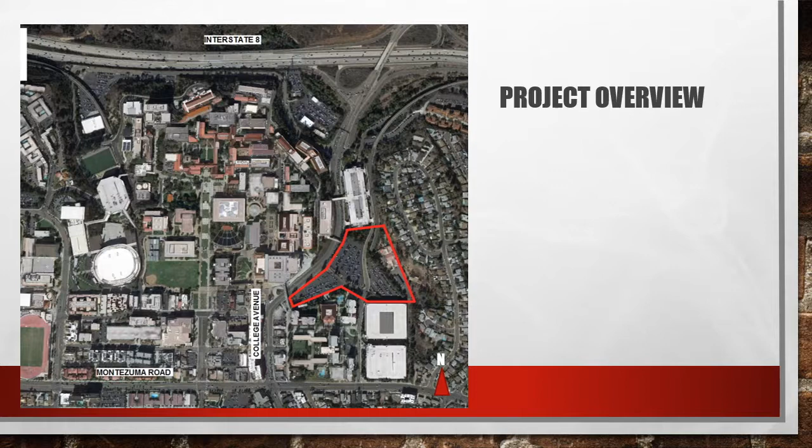The project consists of a study to evaluate the option of building a new football stadium with a seat capacity of 35,000 on the east side of the San Diego State University, SDSU, campus between parking structure 1 and 3.

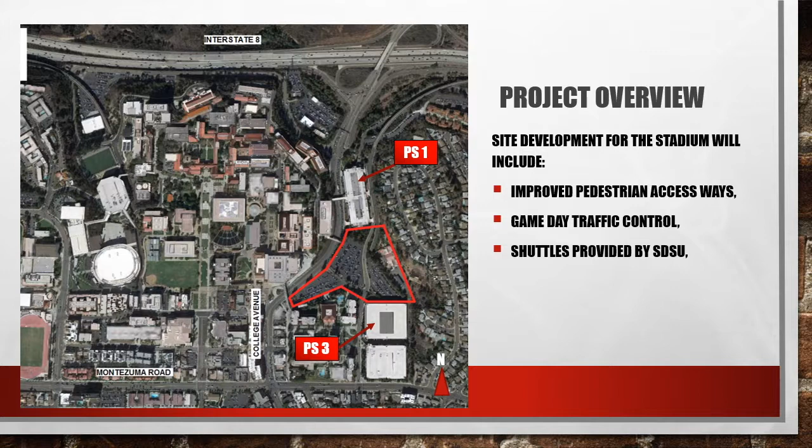Site development for the stadium will include improved pedestrian access ways, game day traffic control, shuttles provided by SDSU, loading zone for attendees, on-site wastewater treatment, and rainwater harvesting under the stadium.

Our project manager and transportation engineer, Miranda McNeely, was responsible for leading the team to success, as well as conducting traffic analysis and improvement recommendations. Our construction engineer, Christian Penlilio, was responsible for construction planning, scheduling, and the construction cost estimation.

Our structural engineer, Juan Ortega Ayan, was responsible for design of the stadium foundation on top of the trolley tunnel, as well as the design for the many site retaining walls. Our site civil engineer and drafter, Gabriel Reyes, was responsible for the drafting of design plans, site grading, and utilities.

Our geotechnical engineer, Fahmi Attar, was responsible for the investigation of site soil type and strength. Our hydrology and drainage specialist, Satara Nuri, was responsible for the evaluation of site drainage before and after construction.

Our municipal solid waste, water, and sewer system specialist, Kevin Clack, was responsible for potable and fire flow water systems, sewer systems, municipal solid waste management, and stormwater quality management and conveyance.

College community outreach to bolster support and enthusiasm for the on-campus stadium would significantly help to lessen the impact of the construction traffic delays on the community. Unfortunately, these worsening traffic conditions are unavoidable as the stadium is to be constructed along a major commuter road, College Avenue.

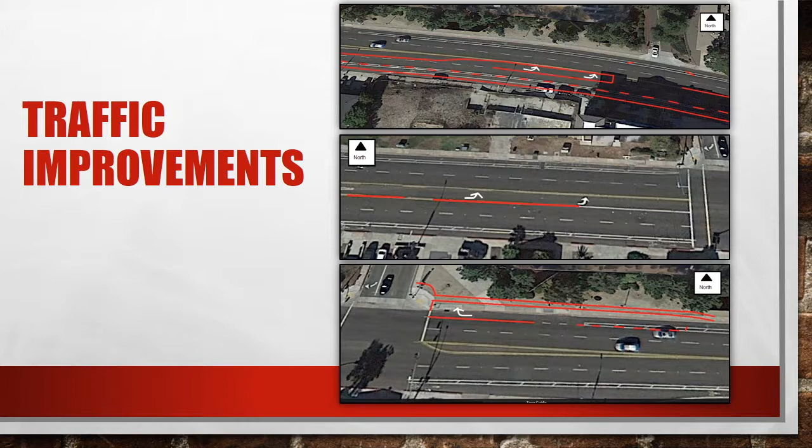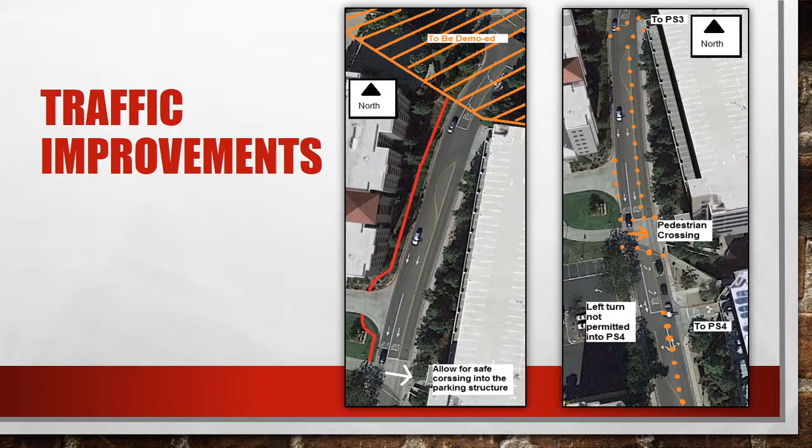Recommended site developments to improve traffic conditions are a complete signal redesign of the College Alvarado, College Montezuma, and Montezuma East Campus Drive intersections, as well as new striping to expand various turn pockets along Montezuma Road, and an additional sidewalk near the stadium. Game day traffic control will also help safely guide pedestrians and vehicles to the parking structures.

3 areas of our site required grading. The first area was graded to an elevation of 426 and serves as the platform for our stadium and a 12 feet wide sidewalk. Due to right-of-way and property line constraints, grading had to be the maximum allowable, which is 2 to 1. This made it necessary to have retaining walls in certain areas of our site.

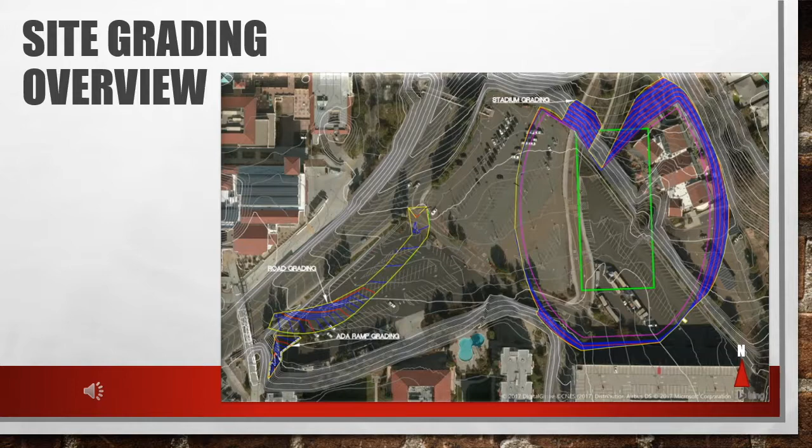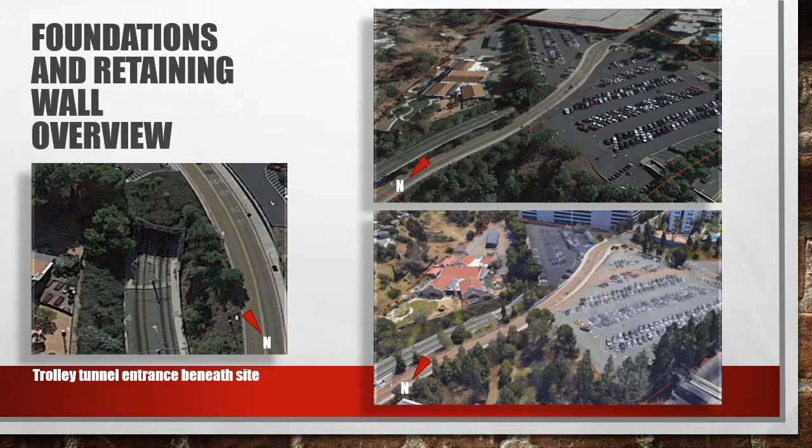The primary retaining walls will have a maximum height of 25 feet and a width of 30 inches and are to be built along the east and north side of the site. As for the trolley tunnel, we are going to make a bridge over the trolley tracks to build the stadium without interrupting or delaying the schedule of the trolley. The actual design and construction of the trolley tunnel expansion will be subcontracted to another engineering company.

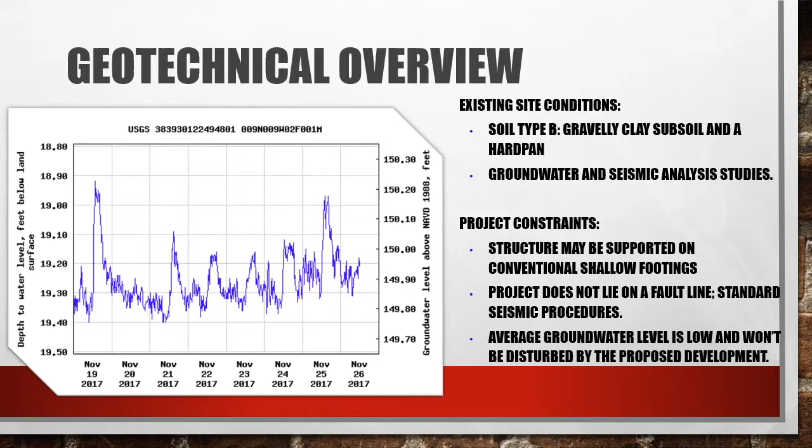The geotechnical study includes sections of soil, groundwater, and seismic analyses. It is found that: 1. The proposed stadium can be supported by conventional shallow footings. That's mainly a concern for the foundations of the design. 2. The project does not fall on a fault line, so standard seismic procedures apply for the County of San Diego. 3. Average groundwater is low in San Diego, and it won't be disturbed by the development of the proposed stadium.

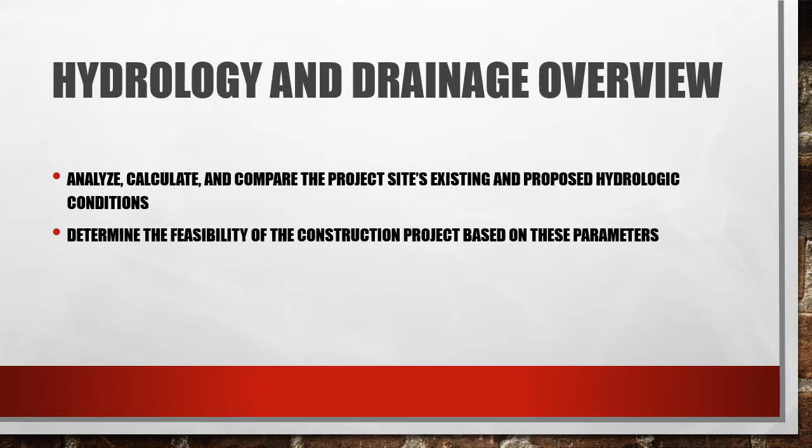The purpose of the hydrology study is to analyze, calculate, and compare the project site's existing and proposed hydrologic conditions to determine the feasibility of the construction project based on these parameters. An existing condition basin map and a proposed condition basin map that show the stormwater runoffs were developed through AutoCAD.

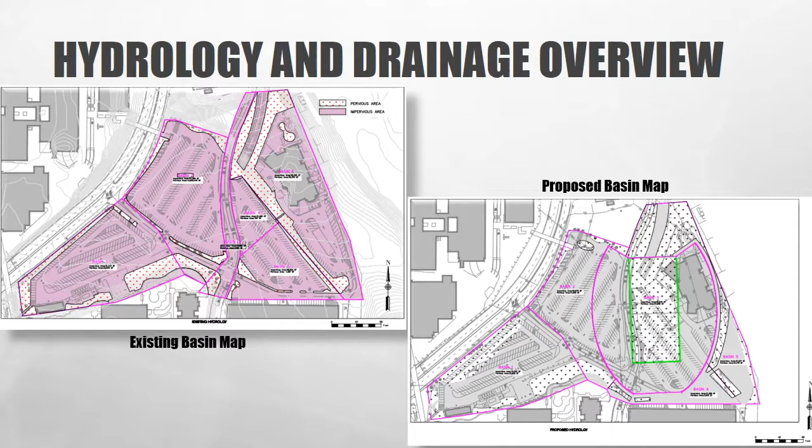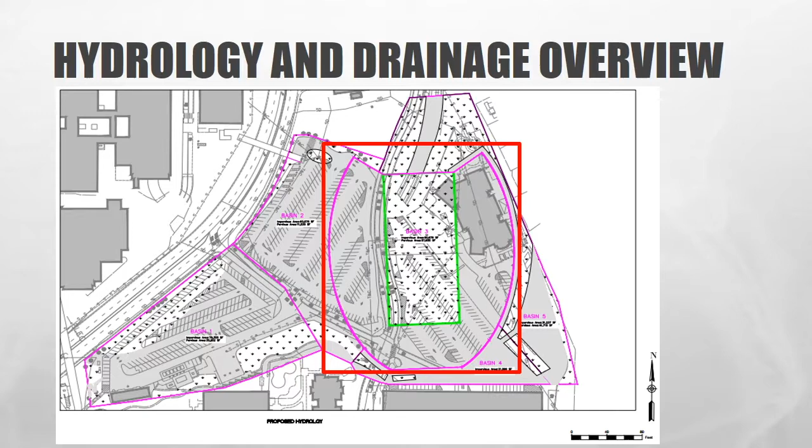It is important to note that in its entirety, the football stadium, which includes both the field and the roof above the stands, will act as a best management practice due to total rainwater harvesting. Thus, the flow analysis for this entire basin will be negligible. Therefore, the site will not produce a substantial negative effect on the water resources of the area, nor will it require big-scope efforts to mitigate issues in runoff.

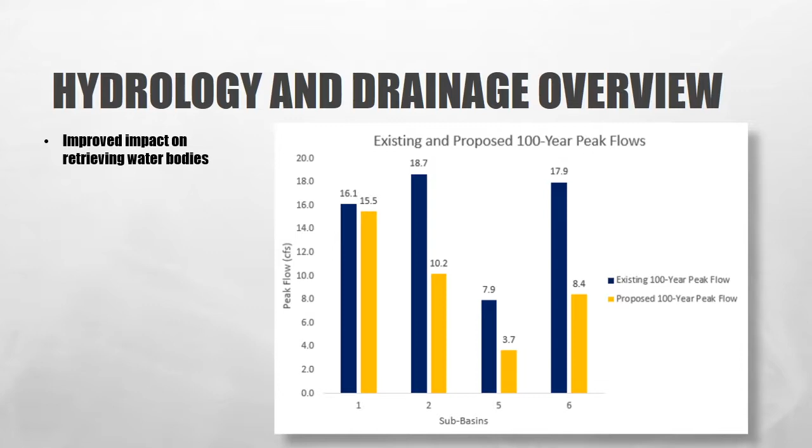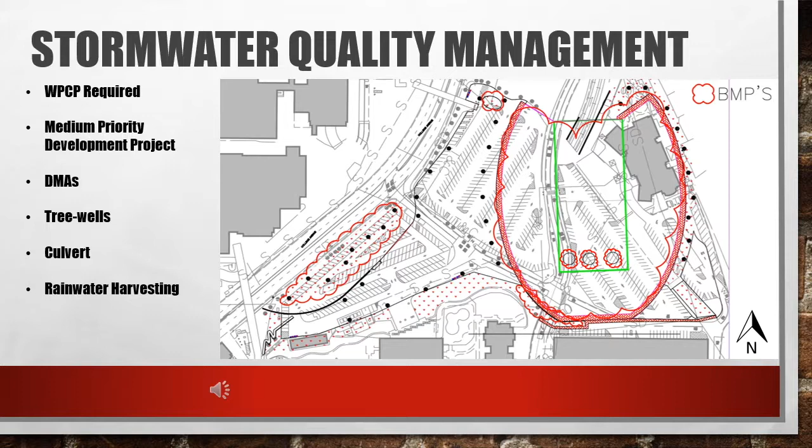BMPs included the addition of self-mitigating drainage management areas along College Avenue, the south end of Parking Lot 2A, the south side of the proposed stadium, and at the east side of the proposed stadium. Next, tree wells will be placed along the walkways to increase pervious area. Additionally, a culvert will be constructed at the north end of Parking Lot 2. Lastly, the stadium will act as a rainwater harvesting basin, retrieving rainwater in three 50,000-gallon cisterns below the field.

In order to meet the demands created by the stadium, it was determined that 12-inch fire laterals connected to the mains on College Avenue and Montezuma Road will be adequate to provide required fire flow demand. In order to meet California Fire Code, 6 hydrants will be placed less than 300 feet apart surrounding the stadium. 8-inch potable laterals were found to be adequate to supply the required potable demand.

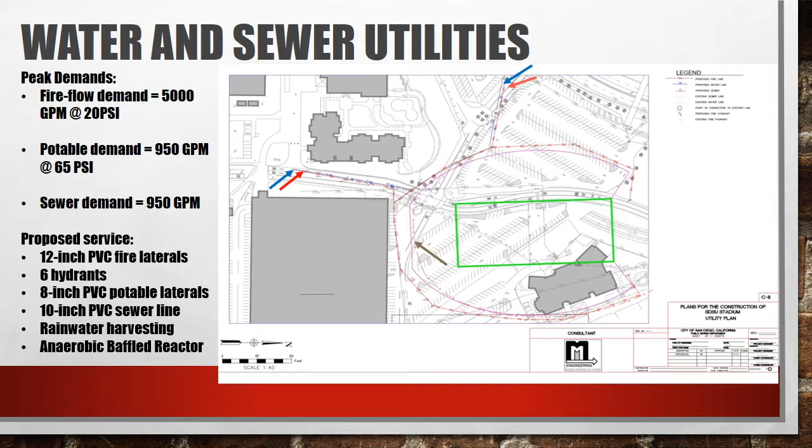The existing 10-inch sewer line was found to be adequate and will be rerouted along the southeast end of the stadium walkway. Three 50,000-gallon cisterns will meet the stadium's potable demand for flushing water closets, urinals, irrigation, and power washing for 80% of the year. On-site wastewater treatment will be included with the use of an anaerobic baffled reactor in order to recover valuable water resources for reuse in cooling systems and irrigation.

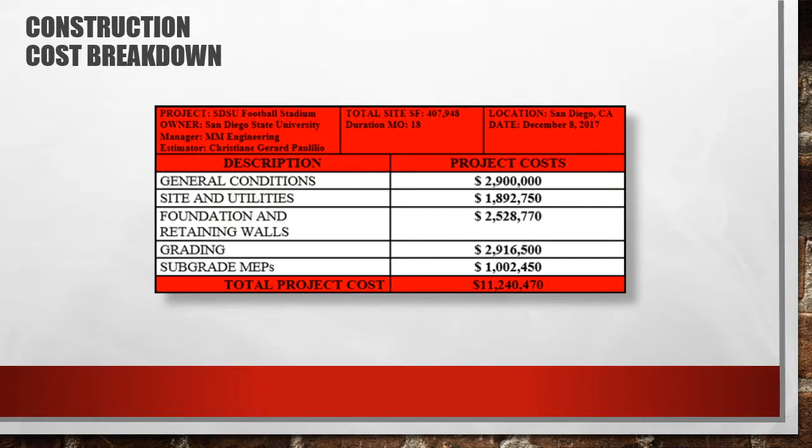For the San Diego State University Football Stadium project, the construction cost overview provided summarizes estimates of the construction phasing plans which were detailed and included in the final design submittal. Here is a breakdown of these construction cost estimates. The general conditions table gives a breakdown of what services were done for this project. The amount for these services subtotals at $2,900,000.

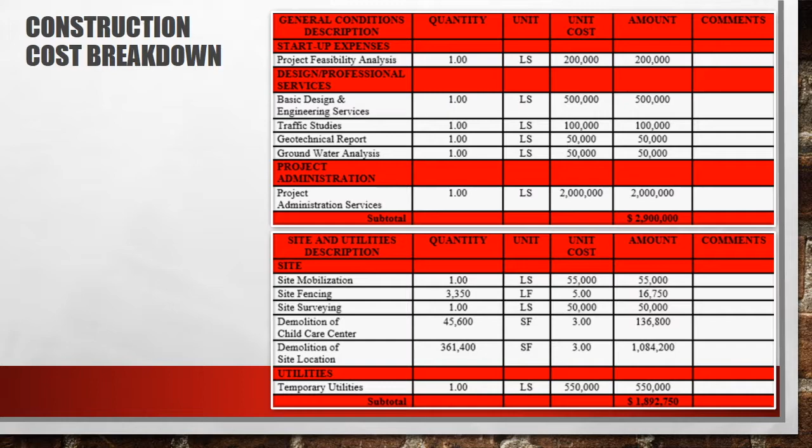Site and utilities show costs for site mobilization, site preparation, demolition of existing structures and services along with providing temporary utilities to the site. The amount subtotals at $1,892,750. Foundation and retaining walls give a detailed breakdown of each retaining wall needed at these specific locations of the site, along with the required footings needed for the retaining walls and stadium. The amount subtotals at $2,528,770.

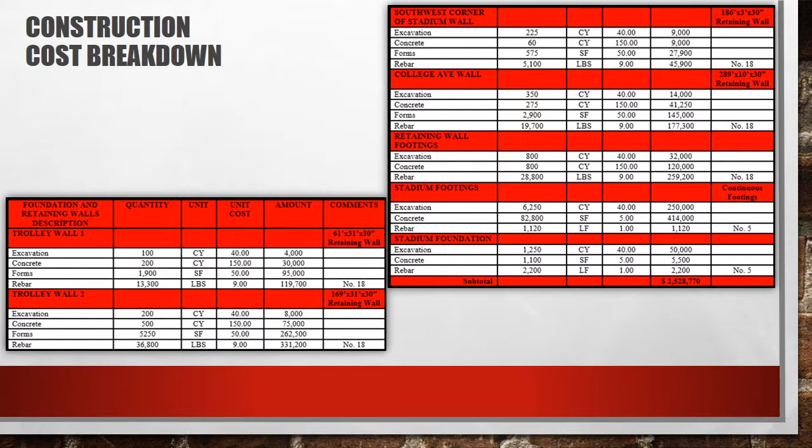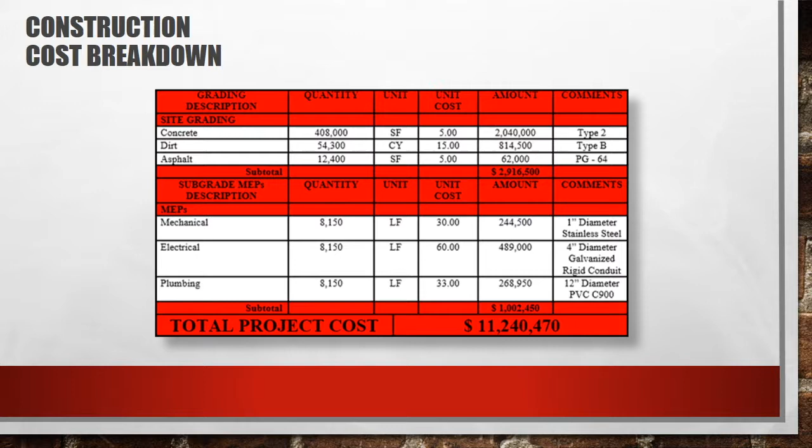Grading details specific materials needed for the site such as concrete, dirt, and asphalt. The amount subtotals at $2,916,500. Subgrade MEPs, or mechanical, electrical, and plumbing, amount to a subtotal of $1,002,450. The total project cost amounts to a grand total of $11,240,470 for site development of the SDSU football stadium project.

The required site development for the SDSU football stadium is an undertaking that will require development outside of the site with regards to surrounding traffic conditions. The existing site conditions, such as utilities and stormwater reuse, will be improved to provide a more sustainable and environmentally friendly system, while still allowing for an exciting new on-campus stadium to be built.